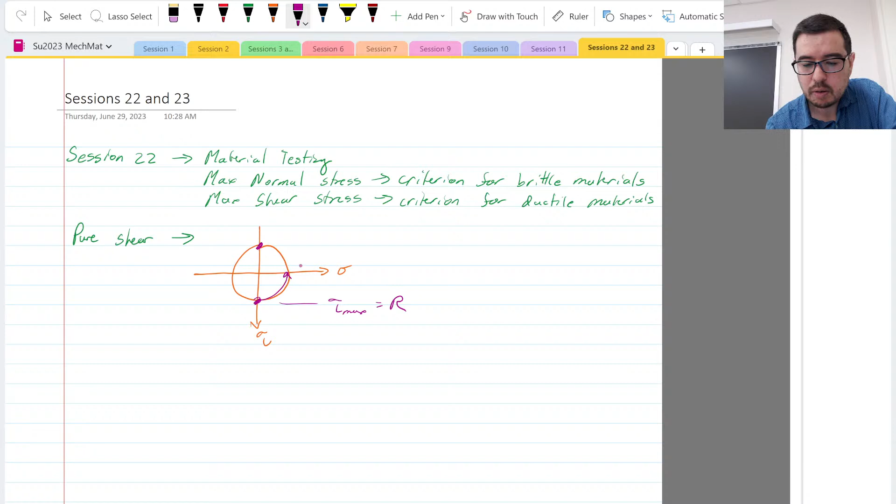If I need to look at the equivalent normal stress here, so this would be sigma 1, this could be sigma 2. Sigma 1 is going to be equal to R, right? So that's a nice case, but you're going to be calculating this out from a T, C, and J perspective, and then we have to think about what's the equivalent normal stress.

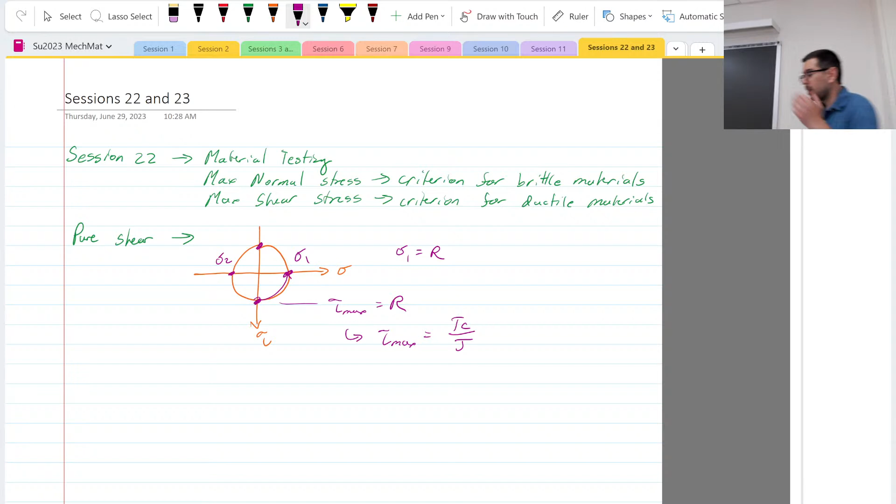This reminds me of a classic example, which I forgot. Normally I'm better at this, you know what I'm talking about, right? Have you seen this before? Do you know what I'm going to do with this? Oh yeah.

So what we have here is a simple piece of chalk, and this piece of chalk is a rod or a shaft that we can load under pure shear. Now, what did we just say when you have pure shear? If you have a rod under pure shear, let's say we're twisting this direction. That's a T applied, and I've got to have a T applied in the opposite direction up here, T and T, in order for it to not break.

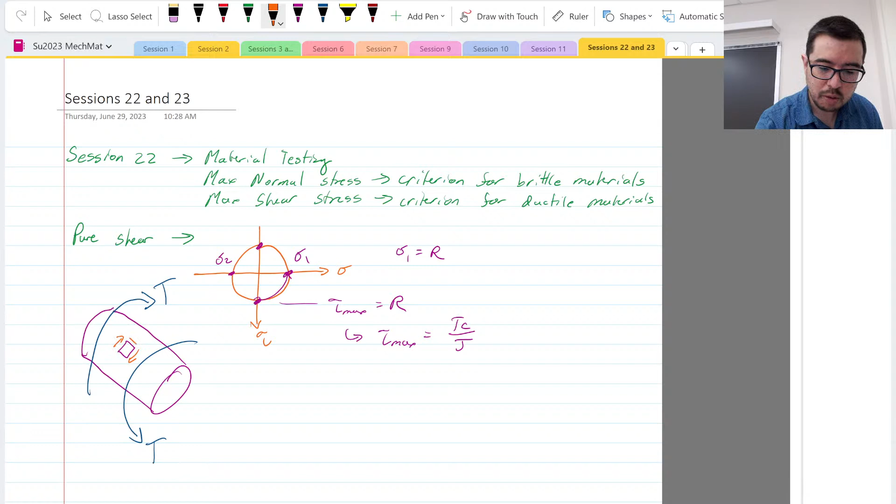So we just said that for this element, where's the stress going to be highest? The stress is going to be highest on the outside, because that's T, C, and J. And we just said that the shear stress is what we see, but we have an equivalent normal stress at 45 degrees.

So now if I put this under shear, where or how do I expect it to fail? I expect it to fail - this is chalk, a brittle material. So I just said that the maximum normal stress criterion is why this would fail. This means that when I apply pure shear, I expect normal stress dominates, and the normal stress is at 45 degrees.

So this is the shear that I have. I've got to orient it 45 degrees so that I get an equivalent - this is at the same location, mind you, but this is why it dominates, this is how it dominates. So it's going to want to fail along this plane, 45 degrees relative to what the shear is.

So now what will that look like? Well, we can actually see it. This is a classic example, right? So we take a piece of chalk and we twist it. Look at this, look at this. All right, you can see I twisted it and it failed - see this? It failed in a helical fashion at 45 degrees.

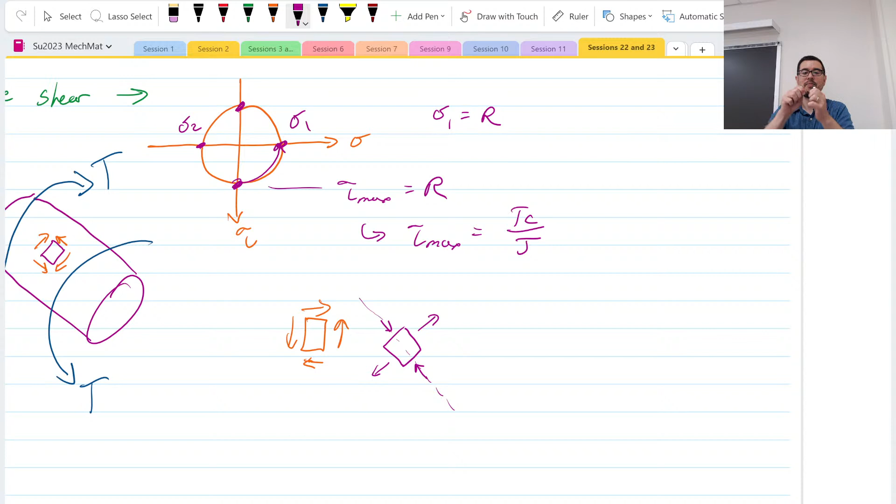I'm now going to apply a bending moment. Look at that - that is 90 degrees. That is really orthogonal, okay?

All right, can you guys see it? This is super exciting stuff. Jason, you missed the twisting, but try twisting this small piece and see what happens.

Whoa, okay. No sorry, you just made a mess. Let me give you a bigger piece if I can find one. Yes, look, I found a huge one. Okay, I discouraged him so much, here, take this one and twist, see what happens.

Okay, so that is an example of what happens with brittle material. Now what happens with a ductile material is...

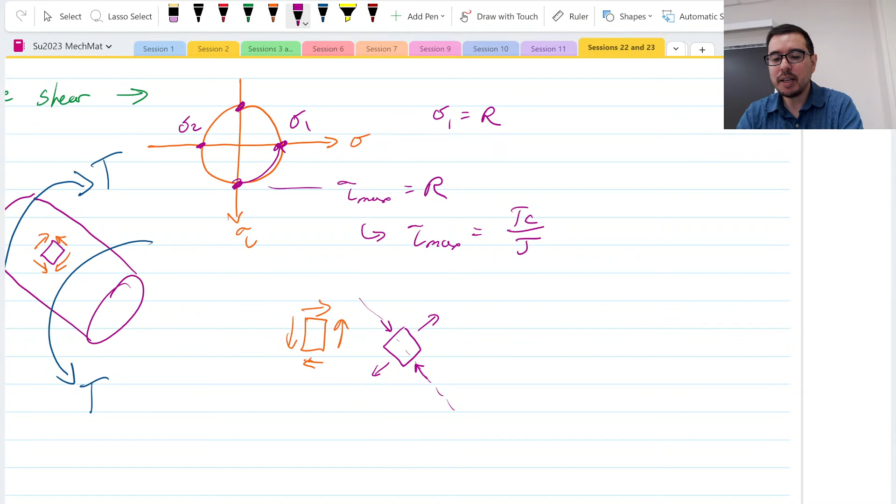A ductile material, it's not as obvious, I guess, because it can depend on the material, right? But the material is usually, at least in a tensile test, loaded uniaxially. If you look in Hibbeler and look online, it's complicated, but what actually happens...

The element is just experiencing stress like this, and the maximum shear stress is going to be at 45 degrees. That's where we get a nice little shear stress, like that. And so what you'll see in some materials is this failure along slip lines that are at 45 degrees.

Those are sometimes called Lüders lines, and that's for your ductile materials. So I don't have a really good mnemonic here. Steels are often considered to be ductile, a lot of them are. So maybe steel is like shear, so shear steel, I don't know.

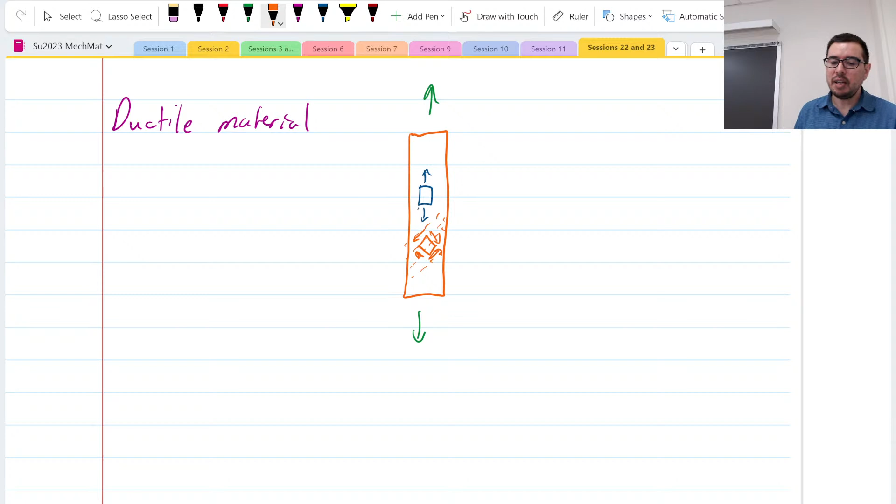But the brittle materials are going to fail by normal stress criterion. All right, how many times do we repeat that? I don't know, that's good enough for now.

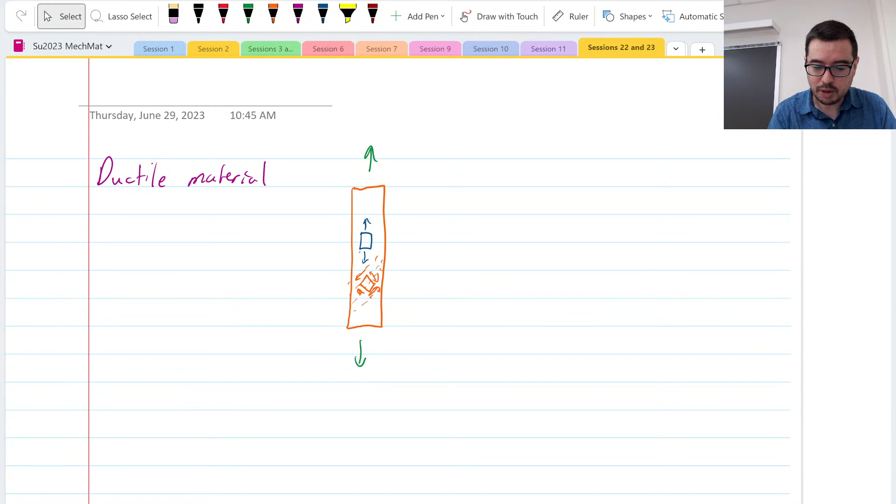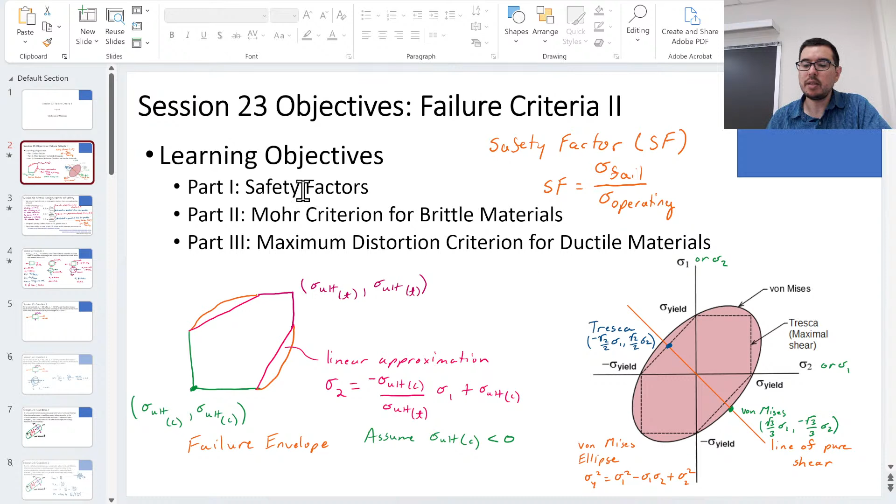So go ahead and start going through things, and in a little bit we'll come back and talk about another criterion for brittle materials, another criterion for ductile materials, and safety factors. All right, go ahead, get started. And if you're still working on session 22, that's fine, I can go around and answer questions on that.

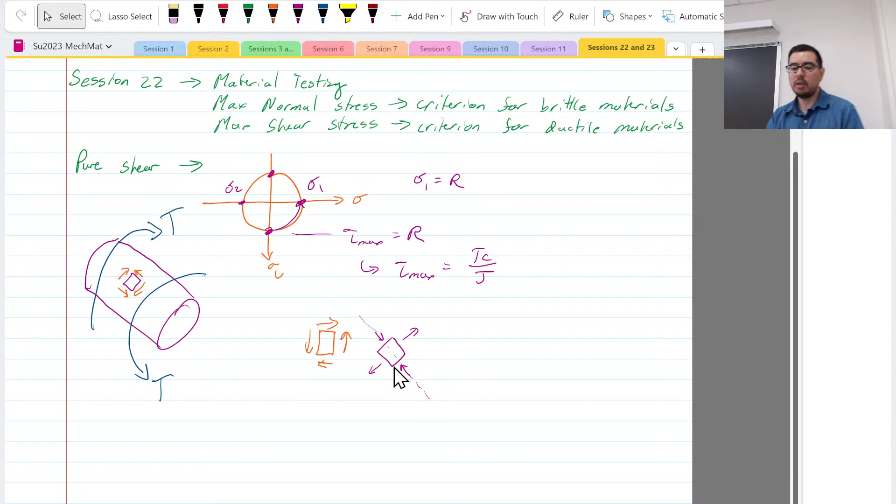As you see here, you have the shear stress, but then you have to rotate 45 degrees and it fails on that normal. It fails at 45 degrees because normal stress is what dominates the failure of brittle materials. So that's all.

I'm going to go around to all the classrooms and grab chalk. You can put the chalk on the chalkboards, or I can take it too. Thanks, anyone else have chalk they still want to use? I still have a few usable pieces. Yeah, exactly, there's still plenty. You can combine it, so nicely.

We also did the example of if you put it under bending. Mark's not here, but if you put it under bending and snap it, it snaps really nicely, normally, right across. Just because it puts... do you want to do that one too, or just wash your hands? Just wash your hands. Okay, because that's bending stress.

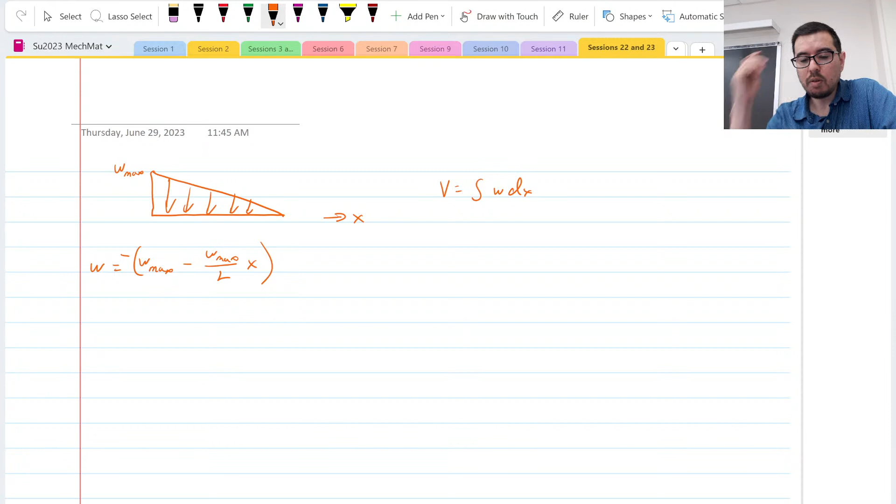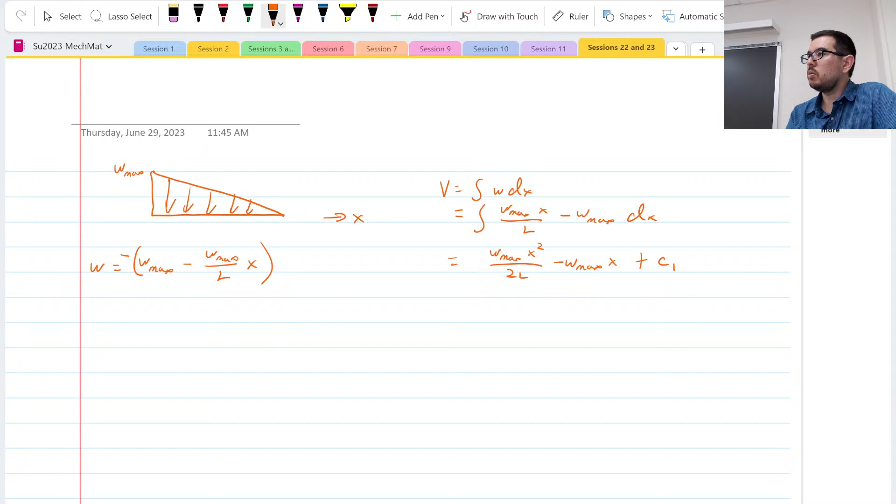So then when you do the integral out, right, you're doing the integral of this guy. Okay, that's a big reason. Okay, now the tricky thing here is, so this is going to be, you know, you have a C1, right? And the C1, that is going to be equal to what, right? Because remember we had on this beam, we had this is on a beam, right? And we had... yeah, and then you got, okay, so it's what do you?

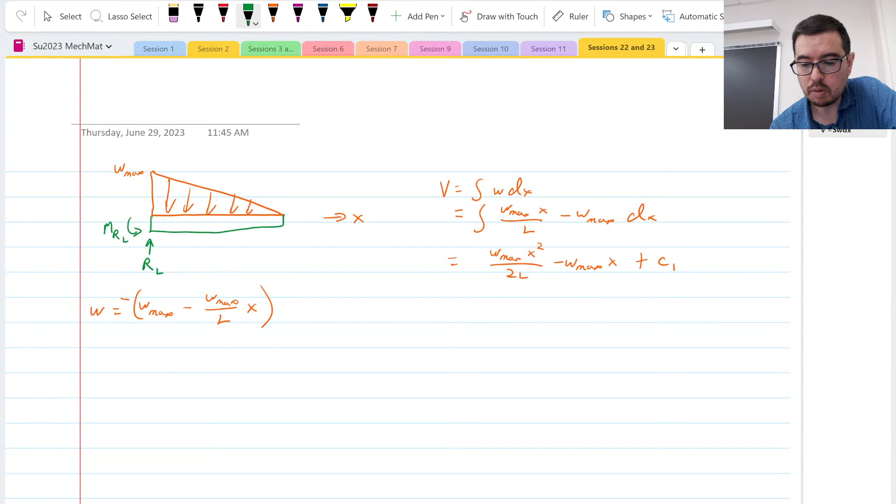Use that, right? We had these things. So we needed to know the internal shear force just at the left side, right? And then internal shear force on the left side is just equal to RL, right? Because so the V left was equal to RL, and that it should be equal to 1/2 W max L, right? Okay, so the C1 over here

is like that. And then you want to check, right? What you want to do is you want to check. So when x is equal to 0, right, then we get v is equal to this. When x is equal to L, right, we need it to come out to be 0. So we plug in x equals L, that's going to be W max, yeah, it's going to be 1/2 W, it's going to be 1/2 W max L. We have this minus W max L, and then we have a plus 1/2 W max L, so it works out. So we've satisfied both boundary conditions. Okay.

Well, really? Then we did this. This was okay, I didn't think you would ask for the exercise. It was part of the session. It was session 12, yes.

So I set up my integral with x facing the other way so there wasn't an issue. You told me when you turned in your exam, but I haven't graded it yet, so I'm not sure what I'm going to do. If you go from the other direction, it'll still give you the right answer. I'll take a look when I see it.

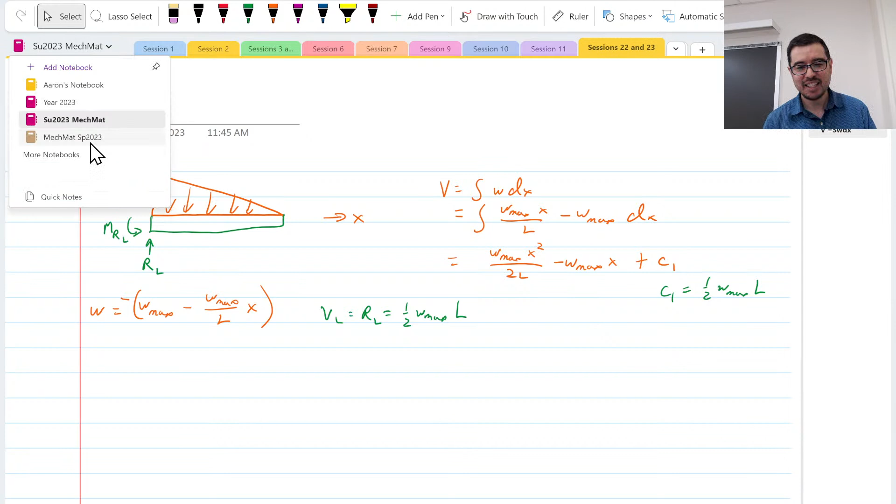Let me check. So yeah, it's going to be basically double. Here, that's what I got, I haven't checked this yet. Yes! I think mine was positive. But it was the same number. Okay.

It should be negative, I'm just making sure that I did it right. Because here's the thing with your professors, if they write their own exam questions, we have to double check that we got them right, right? So as the exams are coming in, this is what I do, I'll perfectly admit that. And I was like, oh, I made that little blip there, right? And so then it gets fixed.

So it's nice when you have students in the class that are really good, because you're like, okay, they agree with me.

Yeah, I originally was adding the 100 sine theta with the 50 sine theta, and then I realized last second that didn't make sense. So I made it a negative sign. Well, also my number was a little bit different, because I was using...

101,325 pascals instead of 101.3 kilopascals. But why? It shouldn't have, because I gave you the hoop stress. No, I mean for the conversion, I was using 101,325 instead of 101.3. But I'm still confused for part B. I gave you the hoop stress, I told you it was 100 megapascals.

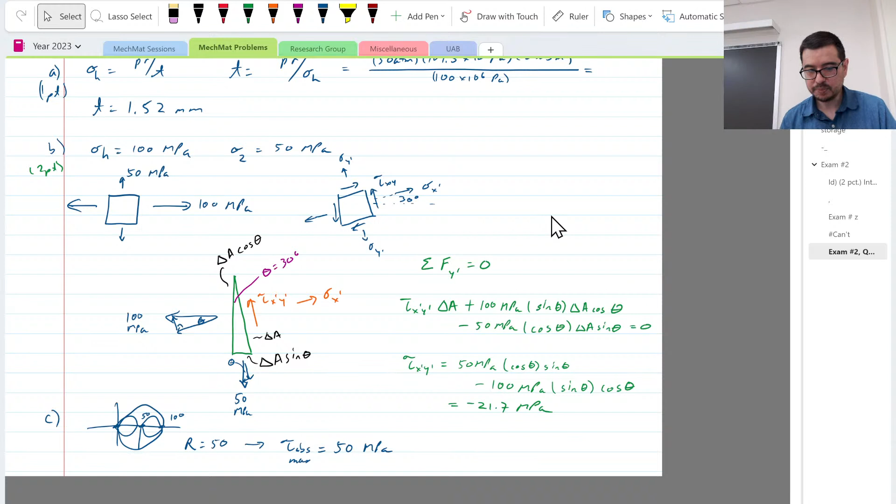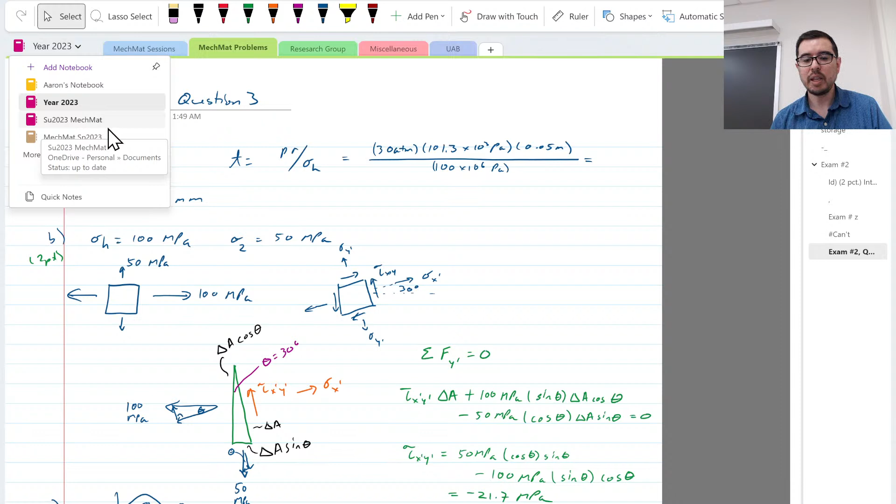What's the class that's considered like after this? There's statics and then this, what's the one that's the same? So I would say design and mechanical components is kind of the one that's most relevant and follows up on this closest.

Because in design and mechanical components, you do a lot of review. And one thing we don't cover in this class is fatigue. Fatigue is very relevant - you need, once again, you're looking at yield strength, ultimate tensile strength, you're looking at how things break, right? So I feel at Rutgers, this is kind of like why things break 2, and then DMC is kind of why things break 3.

I also thought originally that dynamics was the follow up to statics because everyone was saying that. That's why it seems like when you get to dynamics, it's not even remotely similar. And it's interesting that statics is a prereq for dynamics. Yeah, it has nothing to do with it. We got that on record.

So that's very mechanical, I mean some of it is also that. There are multiple things going on in terms of how you build a curriculum, and if there were no prereqs in place, a lot of people would probably just try to load up as many credits as they could, and that can also be detrimental for people. But I can't justify - I mean, I think that feedback is good, and it's something that's in there.

Well, I also never understand why we go faster in physics. Sometimes we do physics that outdoes the math we learned, or is correct with the math we learned. It doesn't make sense. I don't get that.

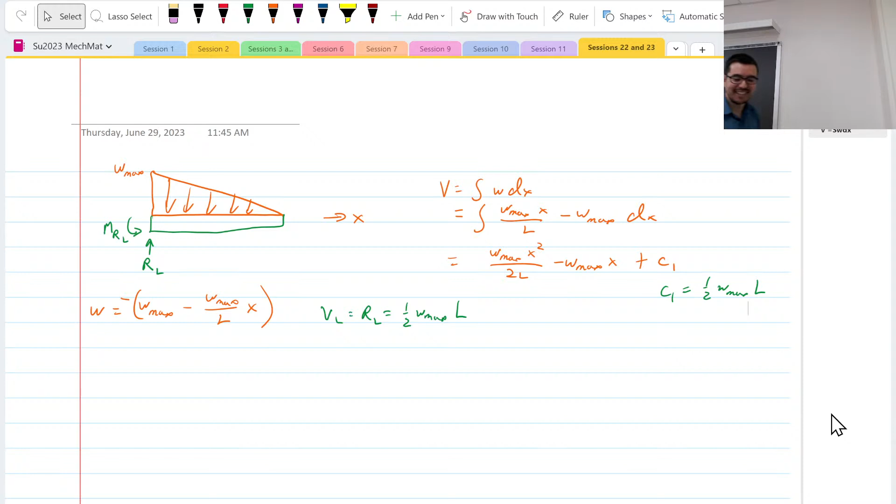But when we started doing differential equations in physics, before we did them in diffie-q, I was like... In Physics 2B, with Schrödinger's equation, you did all the different cubes. Yeah, and you hadn't done that yet in diffie-q. Then you get to that part in diffie-q and you're like, this is so much easier than I thought it was.

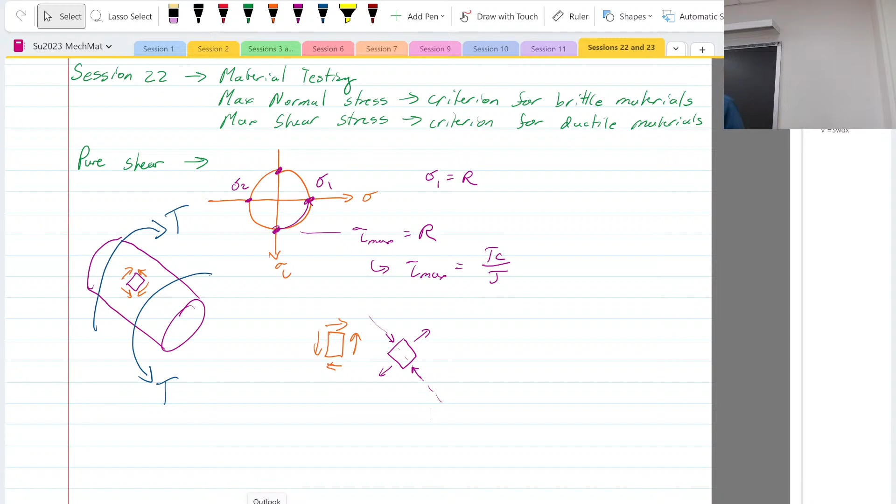Let's see, this is session 21. Okay, how do we do for it? Because it seems like there's a lot more information than we need, but let's go. So for session 21, question 4: what do we have? We have a cylindrical pressure vessel.

Okay, it says that we have an A rosette and a C rosette, right? So the A rosette is in the longitudinal direction. The C rosette is like that, okay?

So what we have is the question of, we have a pressure P, we have sigma H is equal to PR over T, right? And sigma L, we'll call it, is equal to PR over 2T, correct? Everyone agrees with these? Okay.

So you saw for rectangular rosette... this is for the rectangular rosette, right? You see that we can figure out what epsilon B, epsilon C, epsilon A, what they all are, right?

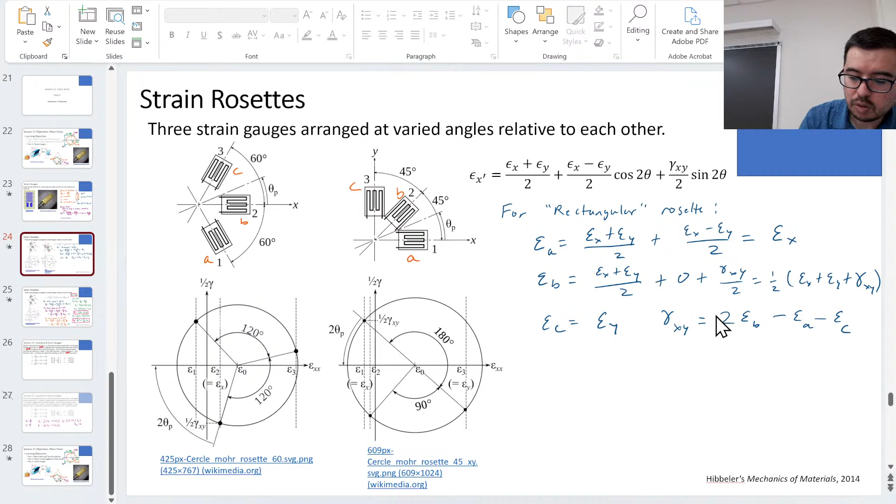So now we need to figure out what epsilon x and epsilon y are. Okay, let's just write this out. Epsilon b is going to be 1/2 epsilon x plus epsilon y plus gamma xy, and we're saying that gamma xy is 0. So now the question is, what are epsilon x and what are epsilon y?

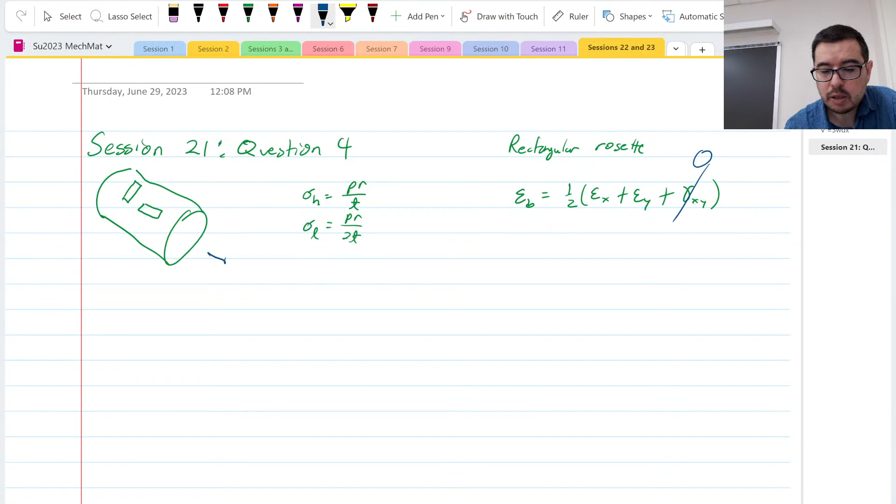Let's just say that this is the x direction, and that this is like coming along where these are. The top, we'll say that's the y direction. Not coming out, coming along, like along there, that's the y direction, right? So z is the radial direction, right? And then we have x and y.

Well, what is epsilon? Let's say now that the hoop stress, this is sigma y, and we're saying that this is sigma x. Okay, now you tell me, what is epsilon x?

One over E times bracket sigma x minus nu sigma y. There we go, yeah, that's right. Remember this formula, right? Because what's happening is that stress in the orthogonal directions takes away from the strain in the direction of interest. So we're saying that this one's 0.

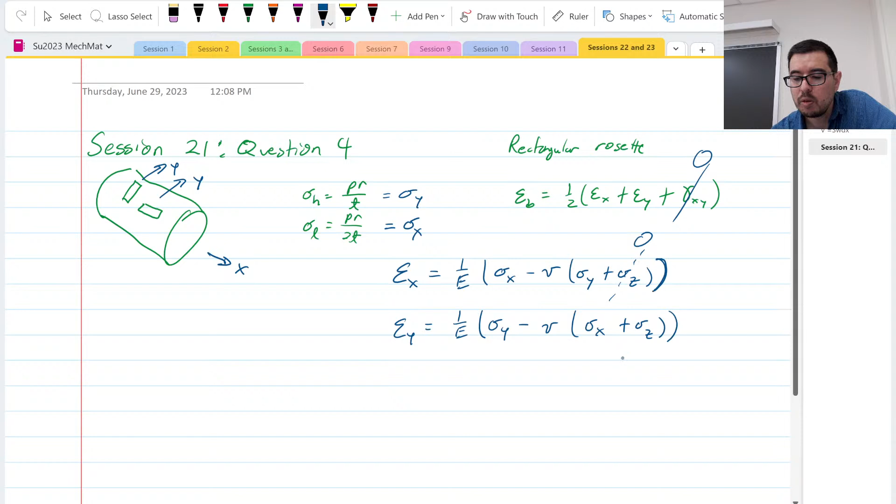Okay? Epsilon y, again, sigma z is 0. Okay.

You have a Poisson ratio, right? You have an elastic modulus. So you can figure out what epsilon x and epsilon y are, and then you can plug them in and figure out what the strain should measure in B. Does that make sense? Yes. Okay, questions? Because you all were looking at this one as well.

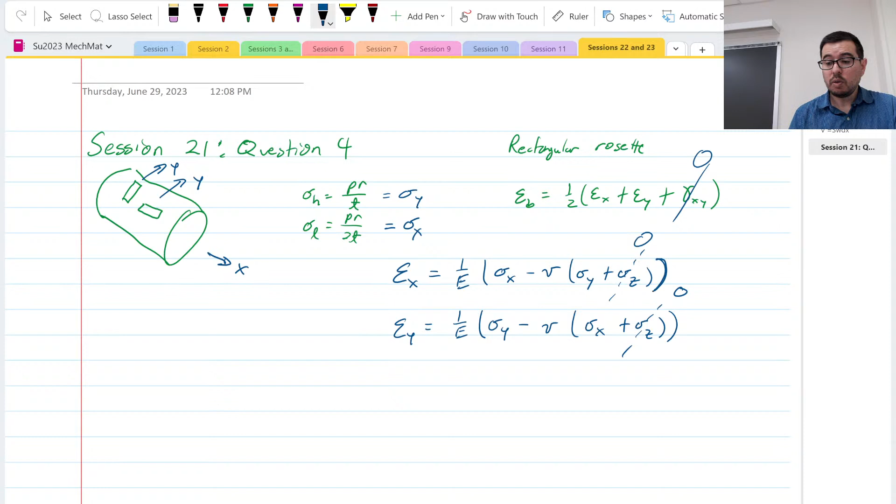Can I still use the square root of everything to make the Mohr circle to find the principal stress? Let's look at this question. This is session number 3, or session 21, question number 3.

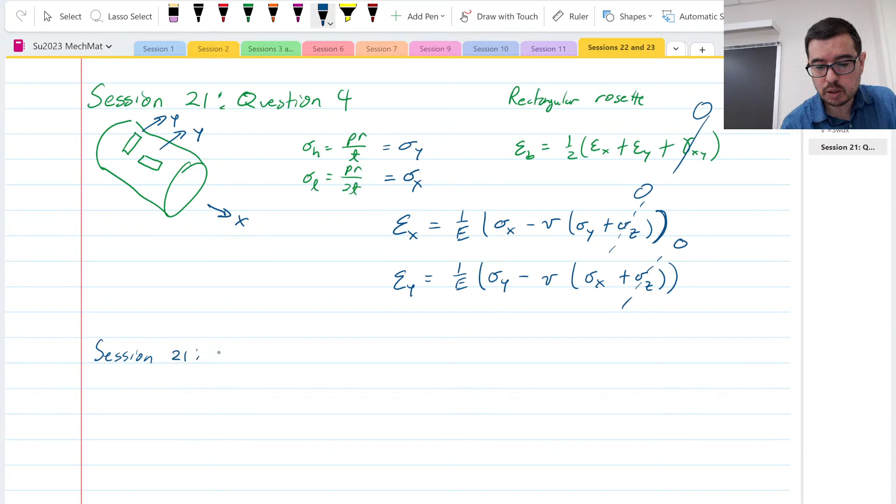In this case, you have plane strain, with epsilon x equals some quantity, epsilon y equals some quantity, and a gamma xy.

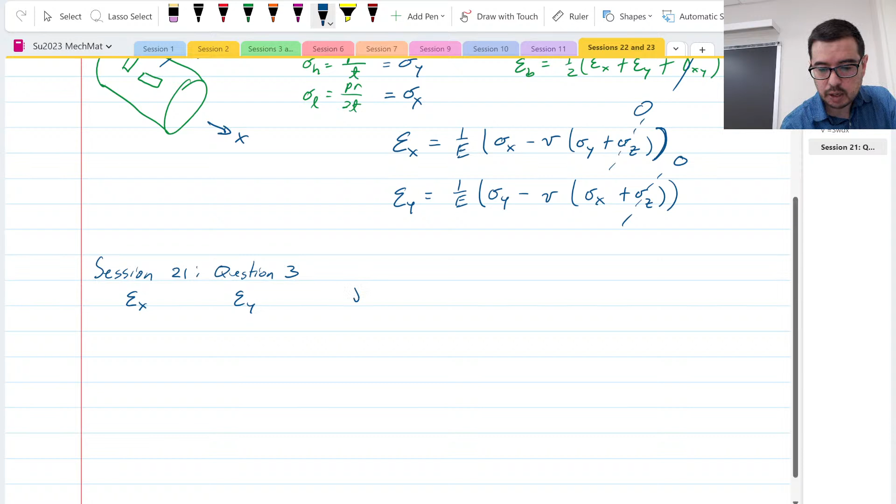So how do we go about making the circle? You tell me. We find the radius with epsilon x minus epsilon average squared plus gamma xy over 2 squared. Tell me not in equations. You plot epsilon x, gamma xy, and epsilon y, negative gamma xy, and then connect them with a line.

Let's show the order. So what do you do first? Epsilon y, negative gamma xy. Okay, we can do it that way. So that's going to give us a point out here.

And then the average strain, which would be... we can do it like this, though it's not the best. But that's fine, so this is going to be the middle, right? Yeah. And then epsilon x, negative gamma, I mean epsilon y negative gamma xy. Sure, like that, so that's up here.

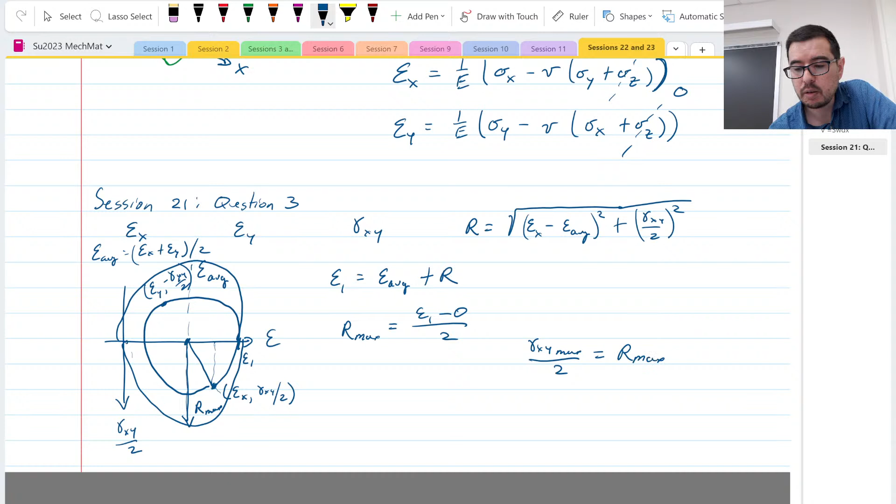Okay, and so that's nice, right? But then gamma xy max over 2 is equal to R max, so gamma xy max is equal to 2 R max.